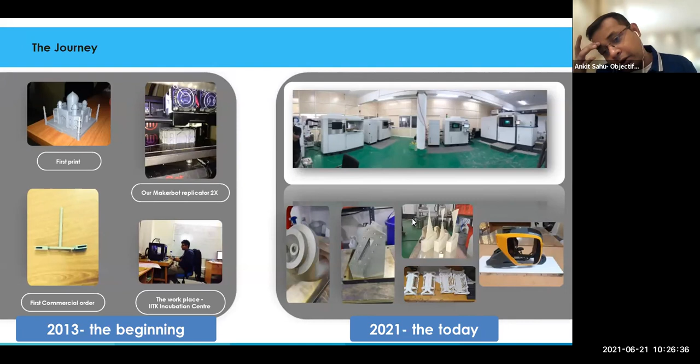Currently, this is the current scenario. So this is our Noida plant. So we have two operating factories, one in eastern part of Delhi, which has all the polymer services, and one in Noida, which is currently showcased, it has all the metal additive manufacturing centers. So these are some of the projects what we have done currently, such as impellers, connecting rods, and blades. So different kinds of interesting projects which we have gone through, and it has been a great learning for us.

We are an AS9100 Rev D certified agency, which is an aerospace QMS, quality management system certification on manufacture of metallic parts and sub-assemblies by 3D printing and provision of related engineering services. So we can do a lot of new developments and a lot of new parts under this certification from AS9100.

So we have been working with these companies for their additive manufacturing journey, and we can proudly say that we have qualified some of the components for the Gaganyaan with ISRO, which is in production, and it is a qualified component, and it will be the first 3D printed component on a manned mission for ISRO. So that is a great pride we take.

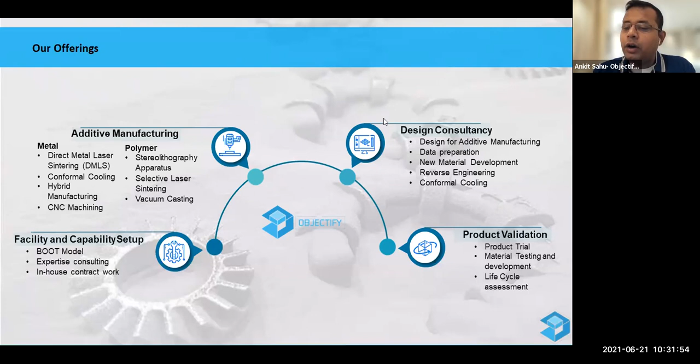So they try to do a lot of assessment throughout the process, because they will be able to change the process through additive manufacturing, and that's how they try to work on life cycle assessment of the components. So this is the current setup what we have. So there have been a couple of additions as we speak.

Hello. Hello. Hello. Hello. Yes. Do you have any question?

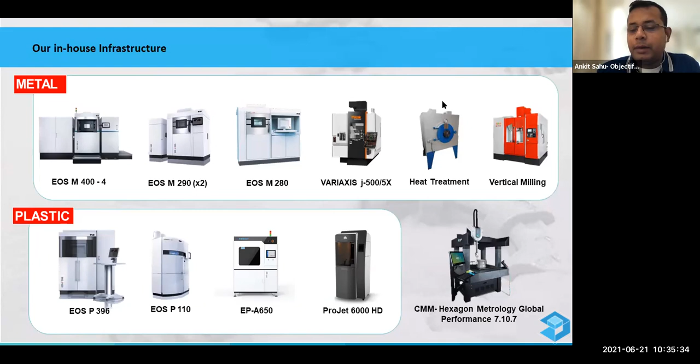On the polymer side, which is based in Delhi currently, instead of one EOS P 396, currently we have in-house 2 EOS P 396. I think last week it landed in India, and on Saturday it became operational for the first time. The second EOS P 396, and EOS P 110, we have a smaller and a faster machine. Then on the SLA side, we have EP A650, which is a Shining 3D 650 by 600 by 400 stereolithography equipment. Then we have a 3D Systems ProJet 6000 HD, which is 250 by 250 by 250 bed size stereolithography. We also do in-house CMM from Hexagon Metrology.

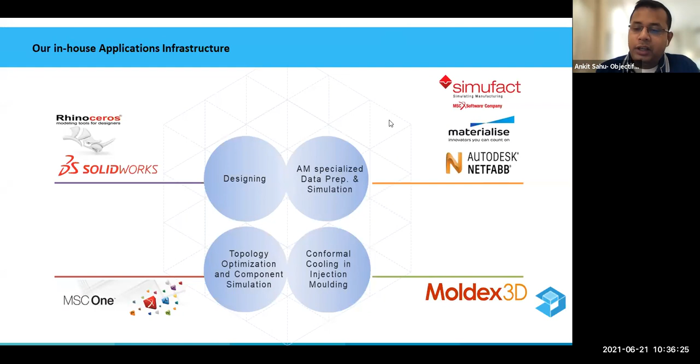As we are invested in the equipment, we are very well invested on the software side, and our team is totally equipped to work on any kind of designs on the CAD side, on the CAE side, or any kind of topology optimization, generative designs through these packages from Rhinoceros, SolidWorks, Simufact, Materialise, Netfabb, and MSC One. We also do simulation for conformal cooling in injection molding inserts, and we serve a lot of tool and die manufacturers in the country through Moldex3D, where we simulate the tools before actually producing the component itself from it.

So I'm just going to start with a great example of metal additive manufacturing. So till now I had been able to talk about the company itself. Now we will be mostly talking about the application, the working, and how to actually funnel your know-how in additive manufacturing itself.

So I'm just taking an example of a jet engine, which is one of the most complex geometries in any kind of manufacturing environment, and this has been a great success not only in India with companies like HAL and Siemens we work with, but companies like Rolls-Royce, MTU Engines, GE, and Pratt and Whitney have been producing a lot of components through additive manufacturing, trying to reduce the lead times and also trying to reduce the sub-assemblies, because a jet engine has more than 16,000 components in a BOM. So if you are able to club and manufacture some of the components together, then you will not only be saving in the number of components in the BOM, but also saving a lot in managing the supply chain itself.

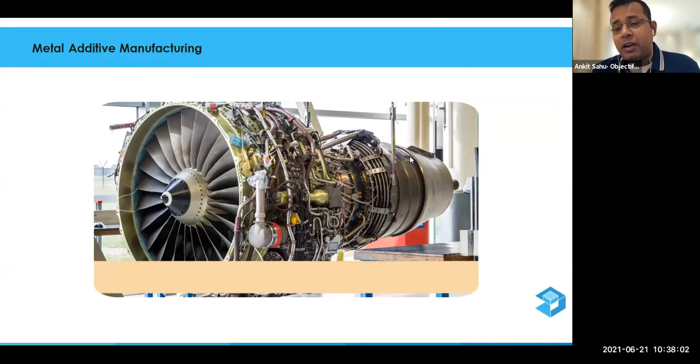So that's how people around the globe are taking additive manufacturing really seriously, at least for jet engine manufacturing. So I will be giving a small example of what activities Objectify has already done on a jet engine. So we have manufactured a flame tube, which is a flamethrower in a jet engine itself. This was done for Hindustan Aeronautics Limited. So this is a 560 flame tube.

It has a wall thickness varying from 0.8 to almost 2.8, and it is 560 in diameter, and we had made this. It is a great example of not just 3D printing but also project management, because in this it is not only about the 3D printing of it, we also got it welded. So this was produced in 5 sectors, 4 of 80 degrees and one of 40 degrees, and then it was laser welded, and it has been functional at HAL for almost 2.5 years now.

It was done in Inconel 625, and additive manufacturing reduced the lead time. Earlier, it was produced through sheet metal, so a lot of brazing, a lot of welding was required, and still the functionality, or taking that into account, was a bit difficult. So that's how additive manufacturing was able to serve this, and it has been a continuous production order for us.

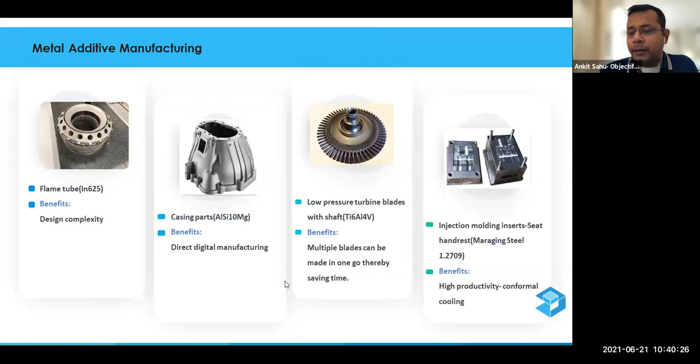So these are some of the material examples, how to select a material for your end application. If you have a high wear resistance application like tooling, you can select maraging steel, which is available as 1.2709 grade, or H13 grade, which is like a DIN number. So you can select according to the material libraries if you are interested in working on certain of these alloys. Then biocompatible materials are such as titanium, which comes commonly in titanium 6Al4V, and cobalt chrome, which has a very good application on the dental side of things.

Then mostly we also work on stainless steel, for a lot of plate manufacturing, for nuts and bolts, for any kind of implants. Then for high temperatures, you can work on different kinds of titanium superalloys, nickel superalloys, and cobalt chrome superalloys. For strength to weight ratio, you can choose titanium alloys. On castable grades, where casting is very much required and flowability is of concern, you can use AlSi10Mg. For sheet metal prototypes, you can have different kinds of steel alloys. Then for high strength steels, you can have different PH alloys, which are precipitation hardened steels such as 15-5 PH and 17-4 PH.

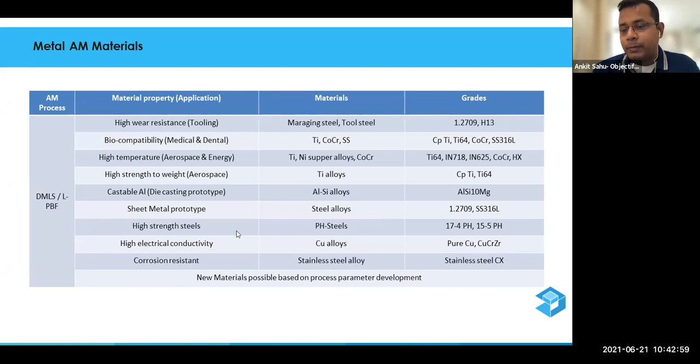Then we have also developed corrosion resistant alloys such as CX, which has a higher chromium content. So we work on these kinds of alloys. So let me also start with how to select a new material for additive manufacturing on the laser powder bed side. People know that a powder is required for additive manufacturing, but they don't know how to select a powder. The data on the internet and everywhere is quite difficult to actually gauge, because there are different powder suppliers for different kinds of applications. But for metal additive manufacturing specifically, you have to have certain criteria to qualify certain alloys.

The typical powder characteristics should be good flowability, the packing density should be really high, the morphology, the shape of the powder, should be spherical, and the particle size distribution should be between 20 to 63 micron, depending on the alloys themselves and their processability. You can have a range from 15 to 45 or 20 to 63. It depends, it is a subjective issue, we can discuss it later.

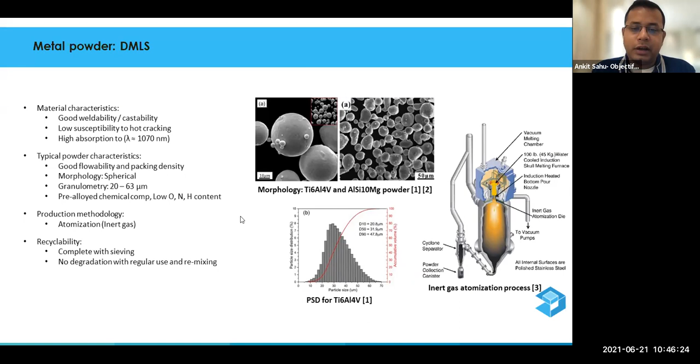Then the recyclability should be really high. You can sieve and reuse the powder, and there should be no degradation when you're using it continuously and remixing it. So these are certain criteria you should take care of when you are going further for any new material development or purchasing a new powder for your application, or trying to convince a customer or your team what the qualifying characteristics of a powder are. If any of you want to screenshot this, you can use it for future reference. It is a very helpful cheat code for working on the specifics of a powder, which is currently the norm.

So I'll take two examples, one in titanium, which is at technology readiness level 9. It is a proven material in the aerospace division, and it is in production for most end users and end customers. Currently, typical alloys available are commercial titanium and titanium 6Al4V, which is grade 5, and you have an ELI grade, which is grade 23. You can process titanium in three different additive manufacturing technologies: laser based powder bed fusion, electron beam based powder bed fusion, and binder jet. Then you would require post processing such as heat treatment and hot isostatic pressing.

The processing challenges are that it has higher thermal residual stress. So if you take a titanium component out of a print, it might have a buckling kind of effect. Just because of the thermal stresses, it might snap within a certain time period if you are not heat treating or stress relieving it properly. Structurally, the density of titanium is always more than 99.5%. It has a very lamellar microstructure. So the mechanical properties are always better than conventional because laser powder bed fusion creates relative density more than 99.5%. The conventional properties of titanium 6Al4V are lower than additively manufactured. So when people ask whether additive manufacturing is good enough for a structural example, you can always quote that it has better properties.

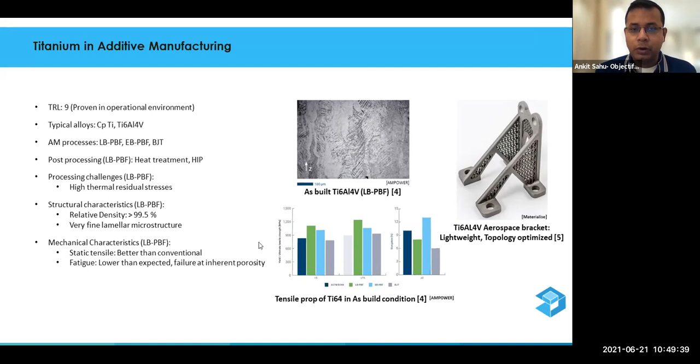As I told you, this is a good example. What I wanted to do here is make you understand a technology readiness level good enough for production, then a material people are currently working on, and as I've told you, copper is one of them. It sits very sweetly in the middle of the technology readiness levels at 5, which means it is relevant for certain applications currently. You can work on alloys like pure copper and copper chromium zirconium. Currently we are working on GRCop-84, GRCop-42, and more alloys on the copper side.

Mostly for the e-mobility space, we have been working on producing copper in laser-based powder bed fusion.

The post-processing requirements are mostly heat treatment followed by water quenching. The processing challenge is that copper has lower absorption, but we have to tackle it because it's such a great space to work in with copper materials. For structural characteristics, the relative density we achieve is around 99%, and static tensile properties are around 210 to 300 MPa. Electrical conductivity is around 80% to 95%, depending on the selection of alloys and the testing temperature.

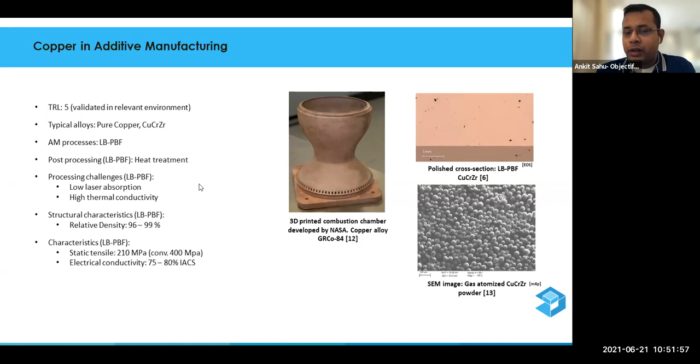At room temperature you will have 95% electrical conductivity, but as you gradually increase temperature, at 600 degrees we have tested the alloy and it's around 75 to 80%. So it is good enough for high temperature applications for both electrical conductivity and tensile properties.

These are some post-processing heat treatment requirements. We should understand why heat treatment is required and why hot isostatic pressing is common in additive manufacturing, because components produced by additive manufacturing have really high thermal residual stresses and involve very high cooling rates. So there is a reduction in anisotropy, and precipitate hardening is also a requirement in some alloys such as 17-4 PH, 15-4 PH, and maraging steel. Some kind of microstructural change is required for enhancement of the material properties.

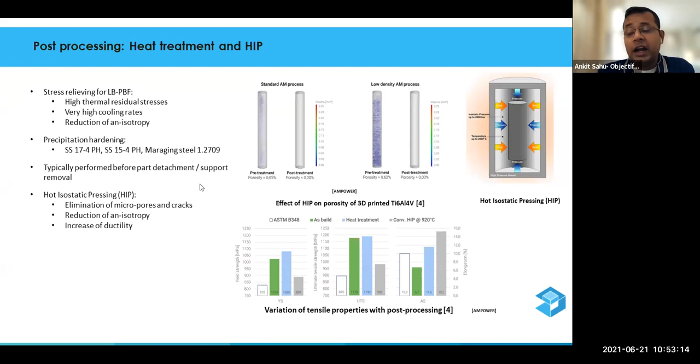Also for support removal and part detachment, we do it as a stress relieving exercise. Hot isostatic pressing is mostly done to eliminate micropores and cracks. Reduction in anisotropy can also be achieved through hot isostatic pressing, and it can also increase the ductility of the material.

How do you select different technologies in metal additive manufacturing? I have made a list of almost six parameters and listed six technologies, so you can select your technology according to the application required. Somewhere cost will be the parameter, somewhere design complexity will be the parameter, somewhere it will be on the material side, then on the equipment side and the build size itself.

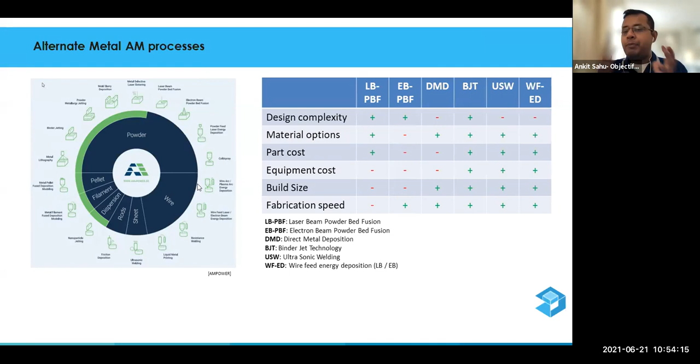You can select a technology according to the application, according to the material, or according to the costing you're looking for. There are certain trade-offs in all the technologies, so you cannot compare an apple with an apple - you have to compare an apple with a watermelon. A watermelon has different benefits to an apple, but an apple also has its own benefits. So you have to compare it according to your needs and move ahead with it.

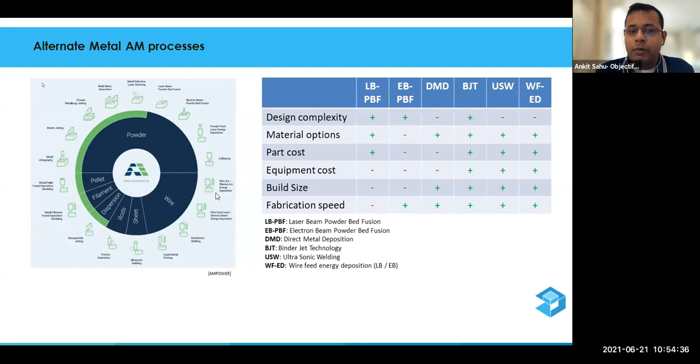What kind of testing is required in development of these alloys? When incoming powder comes to our facility, we test for flowability, chemical composition, morphology, and particle size distribution. We also check for moisture content, because any kind of moisture is bad news for any processing requirement.

After checking this, we try to print certain small cubes where we check the relative density of the coupons developed at certain parameters. Then we work on the microstructure and any kind of crack formation, and study any pores that are there during the 3D structure development of the coupons.

If these two parameters are totally satisfied, then we move on to mechanical testing. Mostly we work on room temperature tensile testing, elevated temperature tensile testing, hardness, fatigue and creep. These are some of the tests generally people work on, but there are certain requirements.

Let's say if you are talking with ISRO, they'll have certain testing requirements on cryogenic temperatures or elevated temperature more than 1400 degrees. So in India currently those testing facilities are not readily available, so we have to supply them the samples, and they test those coupons and qualify it for their use.

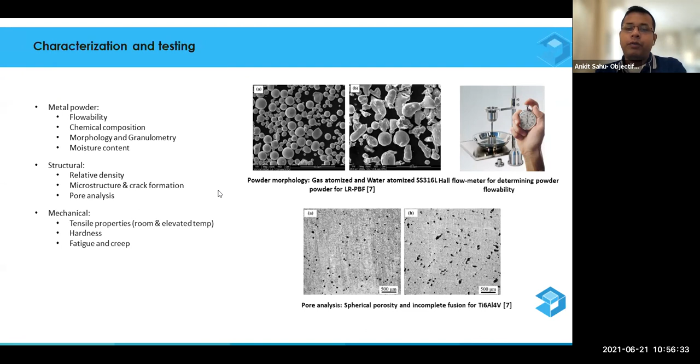So it depends on the customer's requirement, how you want to process it, and the material properties itself. There's a mix of things you have to take care of and mix and match for your end use. The criteria for any new development: it should have very high relative density, and mechanical characteristics such as tensile, hardness, fatigue or creep matching or similar to conventional, or even exceeding it. That is the wish.

It should have no cracks, because cracks are really bad news for any material or component. And the thermal stress management should be really good. You should be able to de-stress the part really soon without losing the integrity of the component itself.

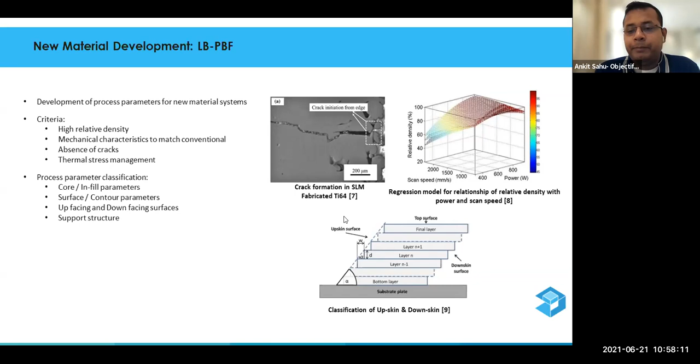Then you also work on the support structure, because support structure is not only important for the integrity of the component itself, but also for thermal stress management. So that's a very crucial role, because otherwise you'll have certain burnt areas or non-effective areas in AM.

So these are like current challenges for any new material development, and it is a costly affair. So we should understand with the customer, with institutes like yours, because institutions in India - I've been a student in India myself, not very far in the past, I graduated just a decade back. But the main problem in the country is everybody's living in an island. The industry lives in an island, the academics live in an island, and the government body lives in an island. There is no contact between them.

But when I was studying in UK, I saw the involvement of industry and academia, and academia and industry, which is very much required, and which actually brings the cost of any new development and further engagement really down. So we can take those key challenges in a new material development with a university partner.

Currently we are partnered with University of Birmingham in UK and University of Warwick in UK. In India we work closely with Indian Institute of Science, IIT Delhi, and IIT Kharagpur. These are the three premium institutes in the country we are working with currently, and two are UK based, because I have a background working with them.

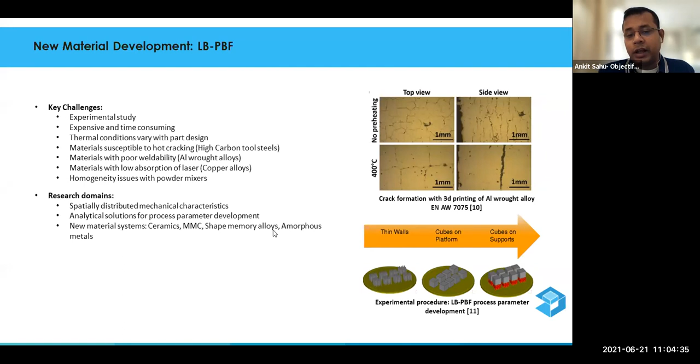So this is very important, what is pre and post processing. Till now I have been able to cover what is the objective, what is the industry, how to select a component, what material you should work on. Now we should work on the process itself.

What people generally mistake additive manufacturing for is just this middle portion, that is just the 3D printing. But actually additive manufacturing is a complete project planning and processing management system. Printing is just 20 to 30% of the complete activity process chain. The majority of it is the pre-processing of the data and the post-processing of the data.

A printer or a machine is like garbage in, garbage out. So you should understand how to utilize the equipment right. You should understand what the problems are. You should be able to foresee the problems in the final component, not just printing it.

In the pre-processing, you have to allocate your 3 M's, which is very important and a costly affair for any kind of organization. One is the manpower time, then the other thing is material, which is direct money, like you are feeding money into the machine. And then the other M is the machine time itself, because you have paid so much money to procure that equipment and it should be used and utilized correctly.

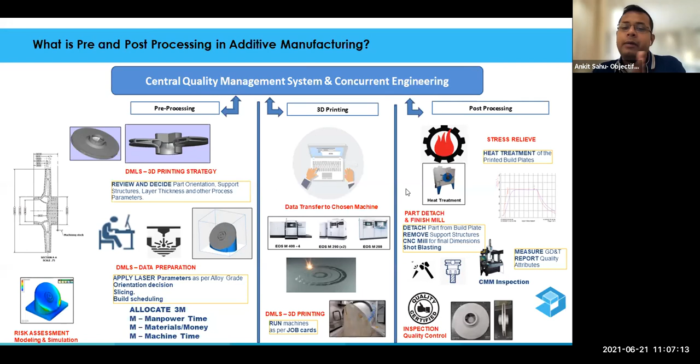So the post-processing is very important because that's where you have to decide upon different kinds of heat treatment, how to detach a component from the build platform, how to do the GD&T later on, such as if you have to do CNC machining, wire cut, or an EDM process just to get the final design right. So you have to select the pre and the post side just to get the 3D printing right. So this is the prime motivation for how to go forward in selection of a process itself.

So on the pre-processing side, I think all are academics, so you understand there is a design stage where you design a component. Then you have data preparation where you orient the component, choose the layer thickness, choose the support generation, then work on the build preparation and the label and the part traceability, because we produce components in millions. So we have to have a traceability portion of it.

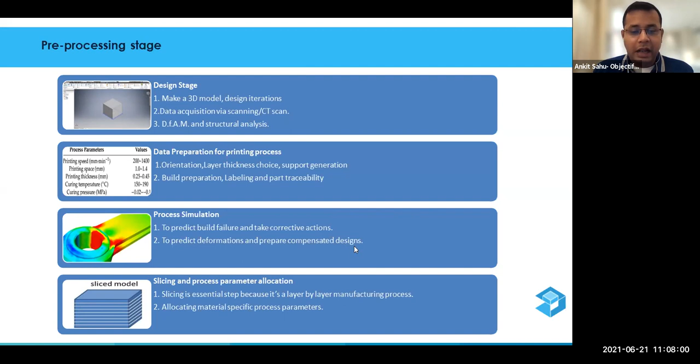Then we also do a lot of process simulation just to avoid any kind of failures. We do a simulation beforehand itself just to predict the failure and take the corrective action. Then we slice the component and select the right parameters for development. So in the design stage, we can do part integration.

And you can also apply lattice structures in the component itself. Currently a lot of people are using it in space applications. There are certain rules for additive manufacturing, design for additive manufacturing. There is a complete guide currently available on the internet which you can work upon.

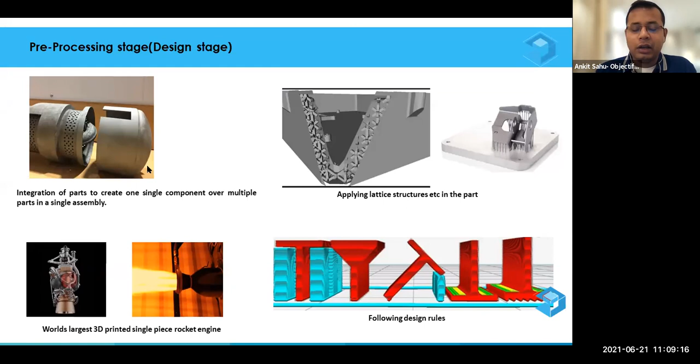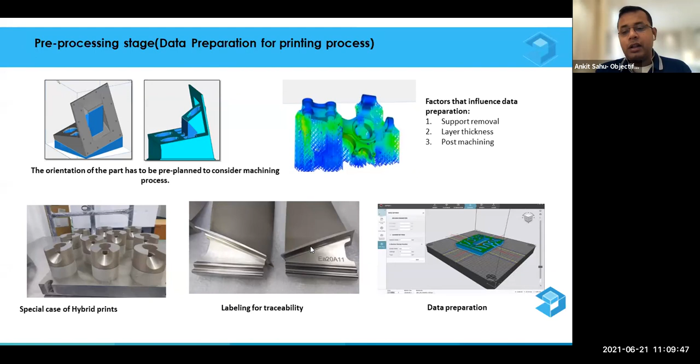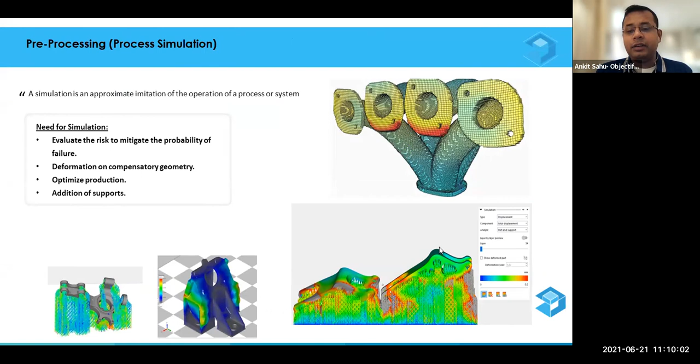Then on the data preparation side, orientation of the component is very important. Then the support generation, then the traceability. As you can see, we have to label the components with the customer. Some customers ask that the traceability should be available with us for the next 10 or 15 years. So that kind of data handling should be there within the organization. Then finally the data preparation for additive manufacturing. Then process simulation is very important, where we work on risk mitigation, compensatory geometries, optimizing our production, and addition or deletion of any kind of supports.

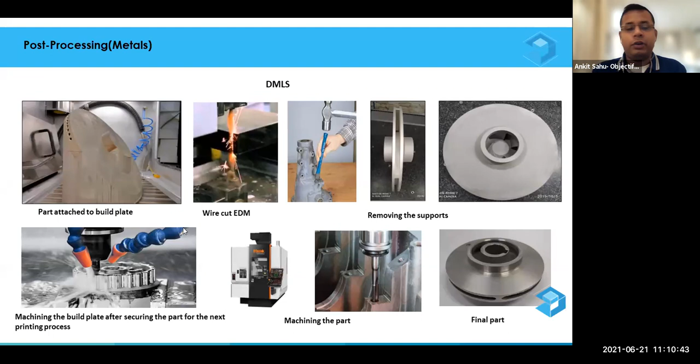So for the post-processing, all these photographs are from our own machines and equipment. This is one of the largest closed impellers we did, for a Norwegian customer. This was a 380 impeller which we built in laser powder bed metal additive, in stainless steel 316L material. It got printed on the machine, then the wire cut, then the support removal, then the machining of the component, and then the final component is ready for the GD&T itself. So you can understand what key steps you should take care of.

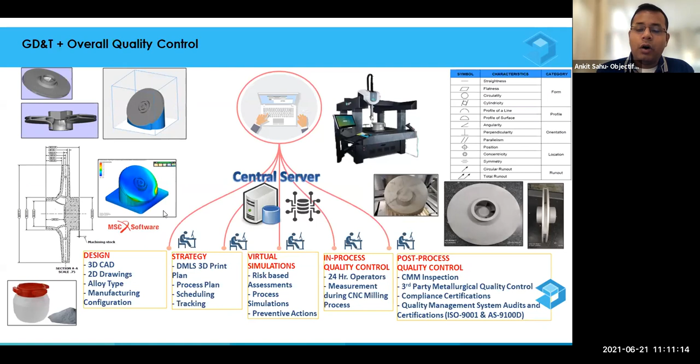Then the GD&Ts and the overall quality reporting to the customers are really important, and it depends on the correct steps you have taken during the project planning itself. So the design, the strategy, the virtual simulation, the in-process quality control, and the post-processing quality control are the most important aspects in producing any component in metal additive manufacturing. So I think this is well known to you.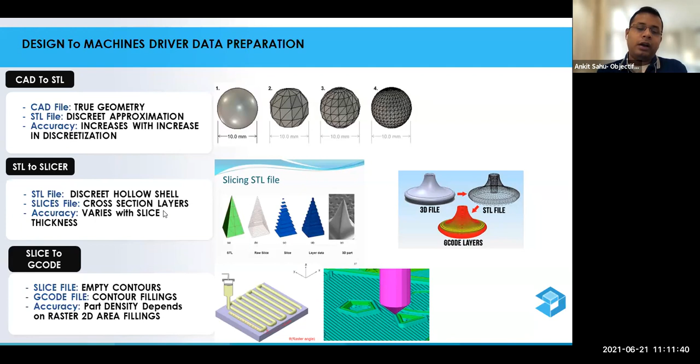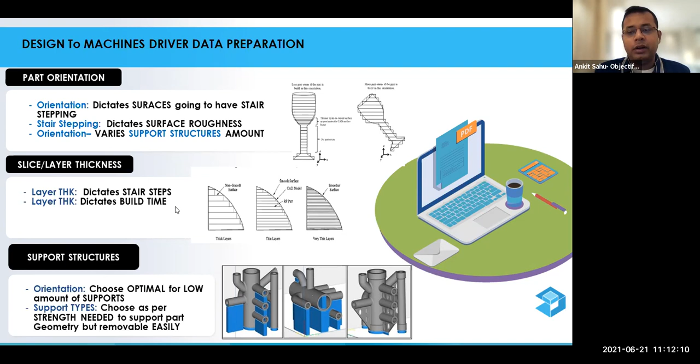A CAD is converted into an STL, which is a feeder in additive manufacturing. Then the STL goes into a slicer where you slice the layers, and you have a definite layer thickness of, let's say, 40 micron, whatever you choose, or 100 micron. Then those are translated into G-codes on the machine itself. Then these are the three most important steps: the part orientation, the slice and layer thickness, then the support structures. So the orientation of the part is a really important aspect. Then the layer thickness and the support. It gives you the final surface finish or the mechanical integrity of the component itself.

So this is a great sheet from Purdue University. We use it at our end, and you should also download this sheet if you're doing any kind of developmental or design or process change for any of your customers or any of your projects.

So it is divided into 8 heads, and you can start giving points in each step, such as complexity, functionality, material removal, unsupported features, thin features, stress concentration, tolerance, and geometric exactness. And according to your numbers given, there are some weightages, and according to the score you get, you can then consider redesign, or it is a direct success, or there is a likelihood of success. So you can decide upon a component, and it is a good case-by-case study for any kind of design for additive manufacturing level of engagement with your end user.

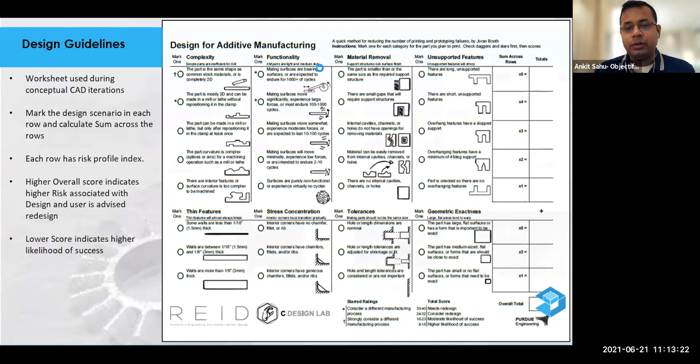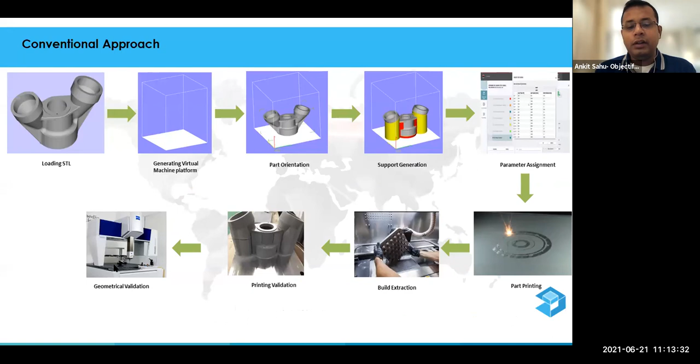So this is the conventional approach, where you take an STL, orient the part, generate the support, assign the parameters, then print, post-process, then do the GD&T. But currently, after starting to do simulation, we have saved a lot of money at our end. So we simulate the stresses, we simulate the failures, and that's how we have been able to save a lot of money in doing so.

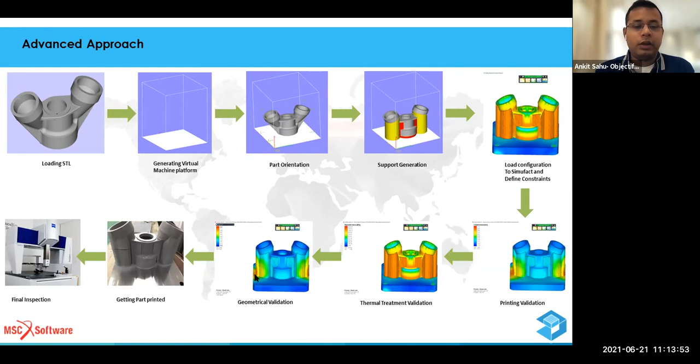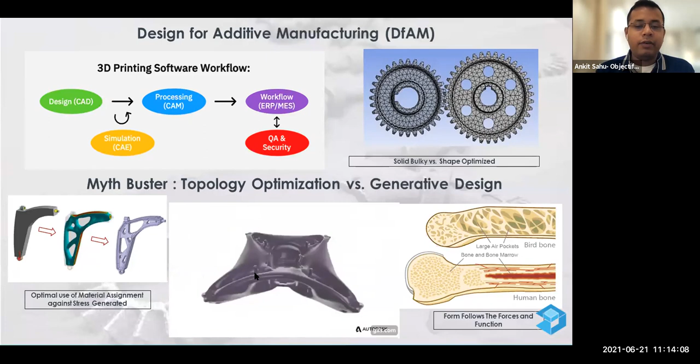So this is topology optimization and generative design. So how you should work upon these activities, how to select what activities to be done, which is currently available with a lot of freewares and softwares. So this is one case study of a structural component in an e-bike, where we are able to reduce the weight by 65%. So it is a great reduction in an e-bike, where momentum is of key importance, and you lose on power as your weight increases. So that is a different mechanical engineering problem itself.

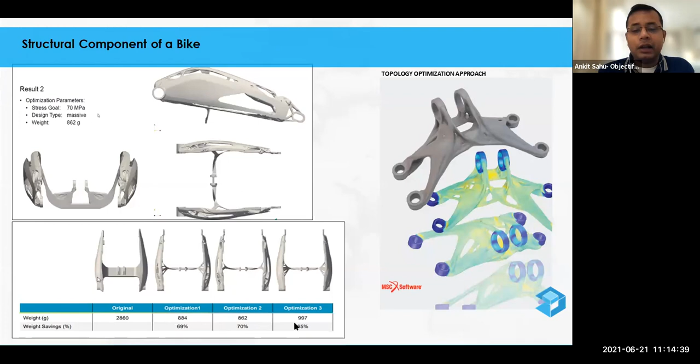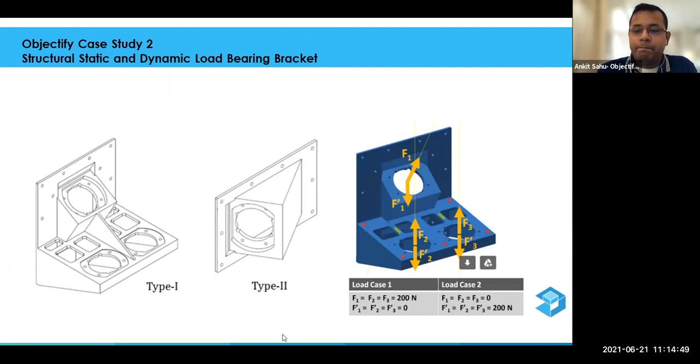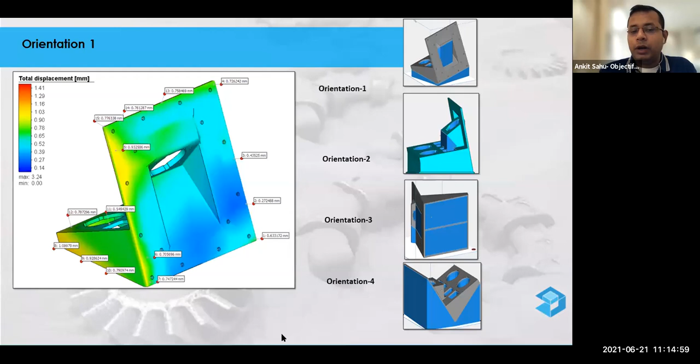So this is already a proven component. This is a qualified VTM bracket with ISRO, and it is in production with us. So this is the way we orient the part and check on the displacement before actually printing it, simulating it on MSC Simufact. Then we select the orientation which has the least amount of deflection or deformation, the least amount of support volume, and the building time should be optimum.

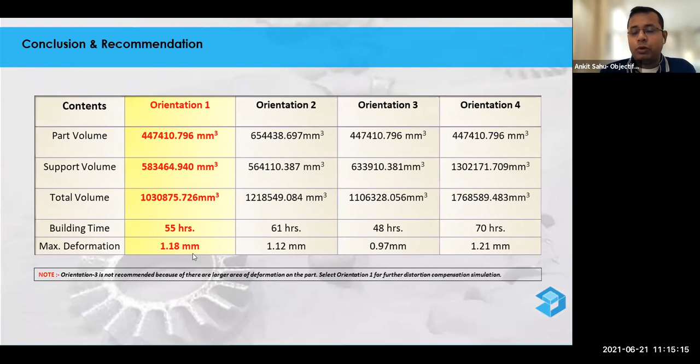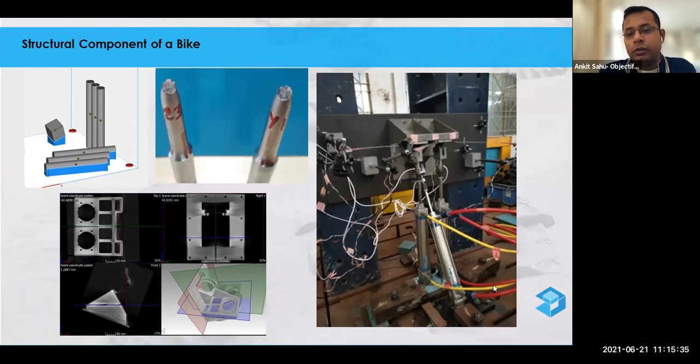So how to select a component for pumping and flow or power? Yes. Carry on, sir. Some participant unmuted.

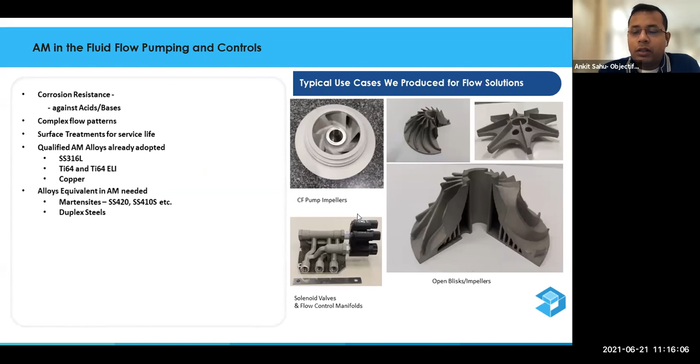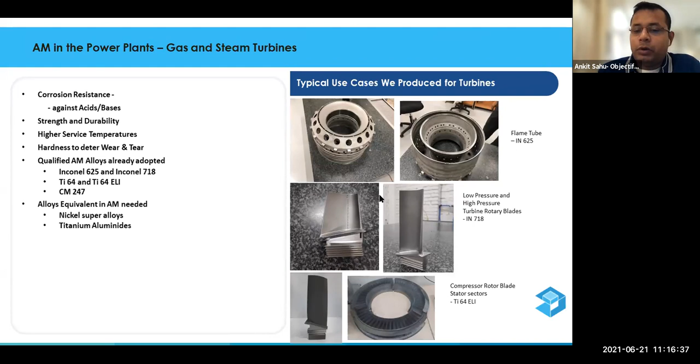Okay. So some pump impellers, for example, some control and solenoid valves, some manifolds you can work on, some open impellers, the valve functionalities. So in the oil and gas and the power sector, we work on a lot of projects like these. Then on the gas and steam turbine, as I've told you, on the blades, the stators, you can see these holes in these blades, which are conformal cooling holes, and which can only be produced through additive manufacturing. And this is a great feature and a great case study for us also, where we are able to produce these in numbers for our end user.

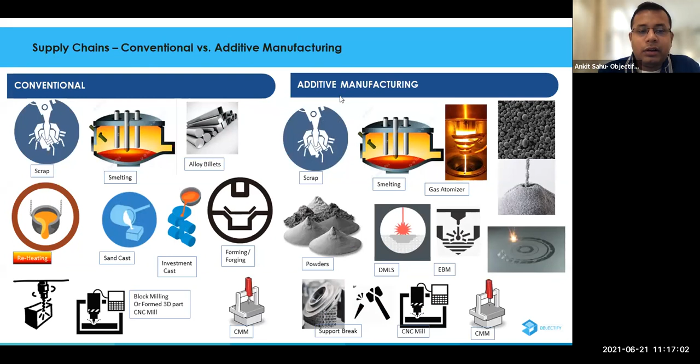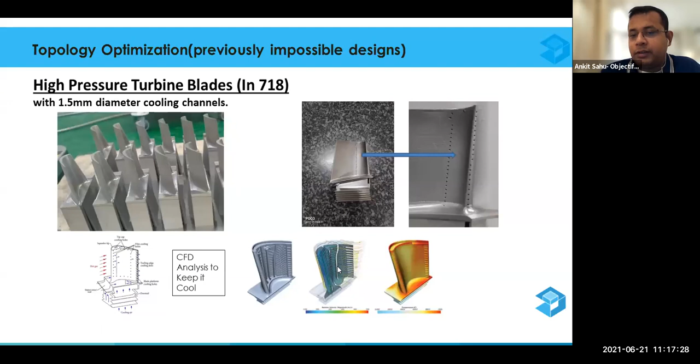So how to compare the conventional supply chain to an additive supply chain? This is good enough for your life cycle assessment studies also, how your material to final product stage and then the utilization stage is done in additive manufacturing and in any conventional technology. So as I've told you about this great case, this was supposed to be operated at 900 degrees centigrade, and just due to these conformal cooling channels, you are able to avoid the plastic state of these blades in service. So it is a great example of utilization of additive manufacturing.

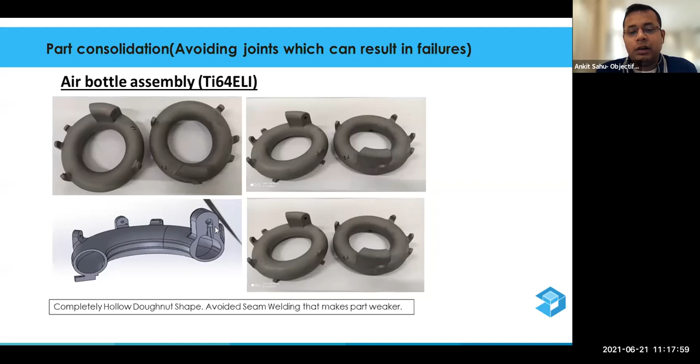So these are the toroidal air bottles, which we are producing for missile programs like Agni and all. Earlier they were made in 2 halves and then welded on top of each other. But due to changes in the design, such as changing some of the design areas, we are able to produce it in one single component. So the flame tube I've already told you about.

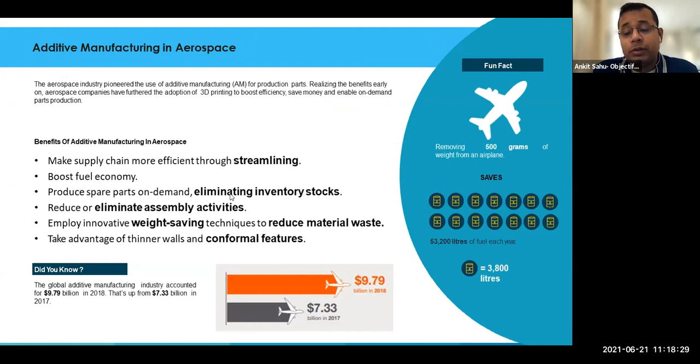So why do people choose additive manufacturing in aerospace? Just to streamline the supply chain, boost their fuel economy, work on eliminating inventory stocks, reduction and elimination of subassemblies, weight reduction, and conformal features. So any 500 grams saved is almost like 53,200 liters of fuel saved in the life cycle of the airplane or aircraft itself.

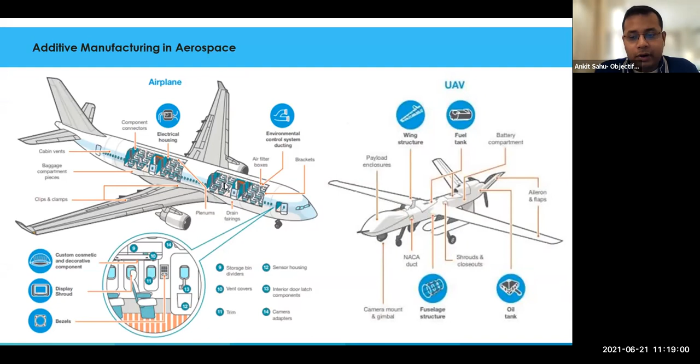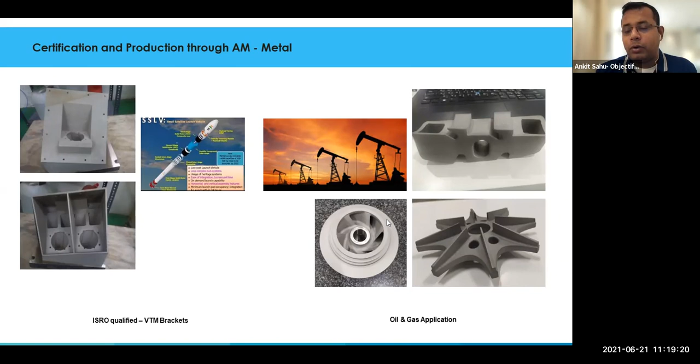These are some of the components currently in production with us. Not only this, we are producing a scraper for deep earth scraping exercises. We are doing a lot of impellers for oil and gas as production, and we are able to qualify a lot of components for them.

So take an example where die casting versus additive manufacturing is required. Earlier it was produced in a die casting environment where 3 lakh or 5 lakh pieces are required. But as we did a lot of work during the BS4 to BS6 transition, the customer needed to iterate as fast as possible and needed some quick components. So additive manufacturing played a vital role, and Objectify also played that initial role with these customers.

So we are proud to say that in any engine development program going from BS4 to BS6 in the country, we have been a participant, be it Hero MotoCorp, TVS Motors, Royal Enfield, Bajaj Auto, Maruti Suzuki, Mahindra, and the Tatas. We have been working with all of these OEMs for their engine development programs during the BS4 to BS6 conversion.

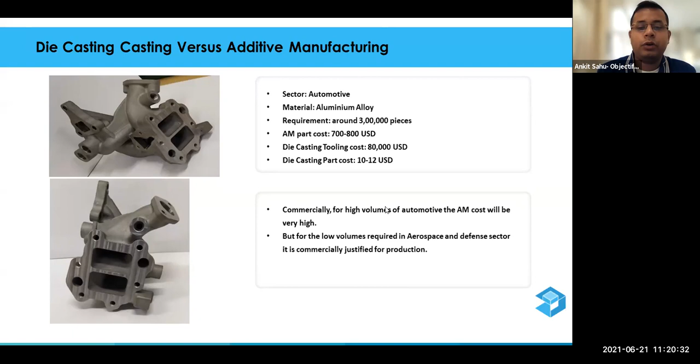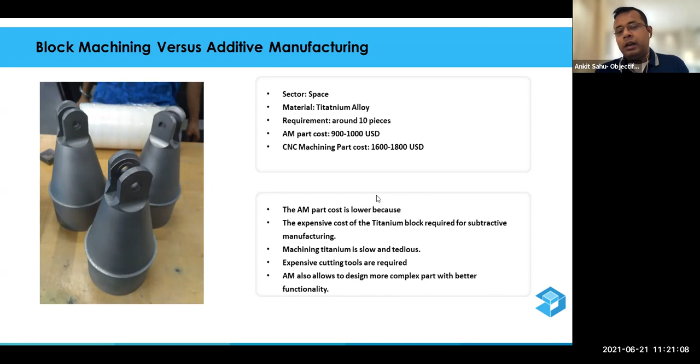You can also compare a block machining project to an additively manufactured project. Take the example of a titanium component where you are machining out more than 90% of that expensive material. You can avoid that, make it a near net shape and just machine the areas where it is needed. So it is a great candidate for production because it is cheaper to produce with additive manufacturing compared to machining.

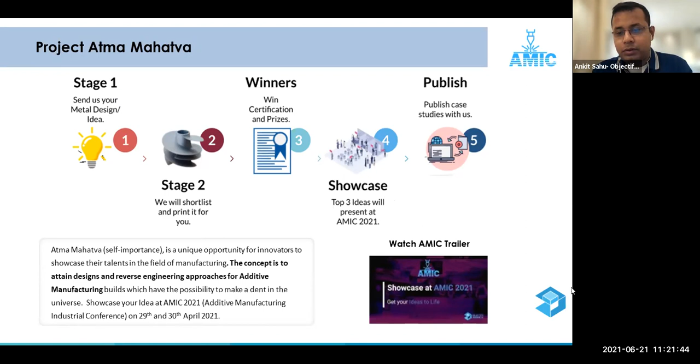So, I have some problem with my presentation. Sorry. Yes. So I'm just at the end.